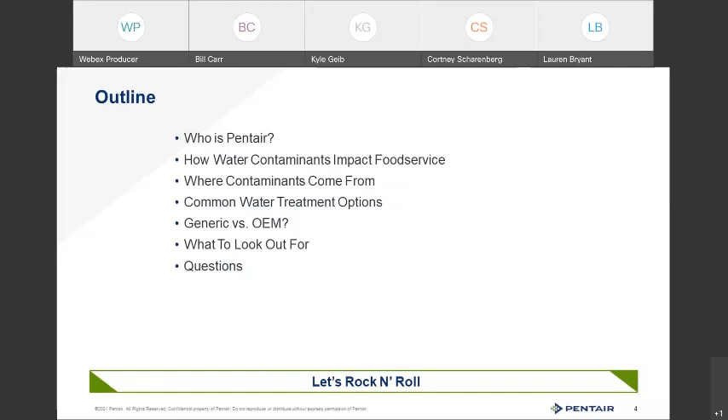But if you do have questions as we go, feel free to type those in the Q&A box. All right, so who is Pentair?

Pentair is actually a very large multi-billion-dollar water treatment company. We cover all different types of water treatment out there, from wastewater treatment and flood protection to aquaculture, aquatics, like the aquarium here in Chicago down the street from me, we have that, agriculture, you name it, we do it. We also have a residential group that makes components for softening and things of that nature. But what we're going over today is our food service and commercial water treatment solutions.

And that's the category that I come from and that Bill covers, and Partstown as well. So the brands you see here on the screen are maybe the names that would be familiar to you under the Pentair brand. So the one that's been around the longest is the Everpure line. We have 85 plus years doing water treatment for food service and commercial products.

The SHURflo brand, that's fluid movement for beverage primarily. Bag-in-box pumps and repressurization pumps, things like that. That's the SHURflo line. We recently acquired OptiPure. You may have seen that one out there before. We will be rebranding them to Pentair OptiPure.

And then another company called Clearwater Technology. These are ozone products. So we do have a handful of ozone products out there that you can get your hands on, one specifically for ice machines that we'll touch on, but we have some others as well that unfortunately we don't have time to go over today. So if ozone is something you're interested in, please definitely let Partstown know and we can get you hooked up there.

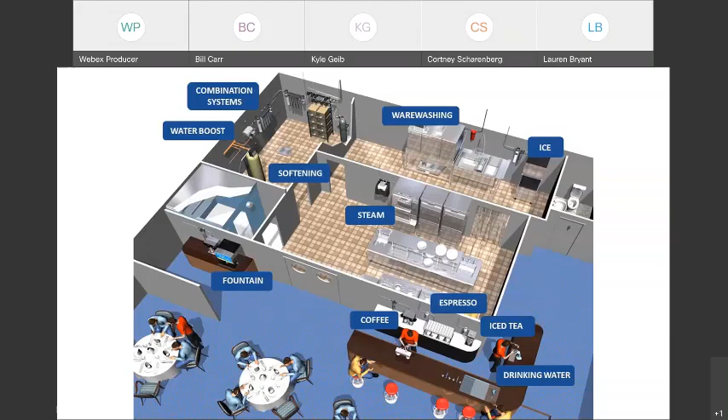Hot equipment is going to be a little bit more sensitive to certain things, whereas cold equipment might be less sensitive to those, or cold equipment might have special issues with different contaminants that hot equipment isn't going to have. But everything you see here, we can treat in some way, shape, or form.

Either at a point-of-use solution, where each individual piece of equipment can have its own water treatment product, or we have ways to put multiple pieces of equipment on one system to streamline a space issue or give you one system that can be in the back of the house.

We can also do what's called point of entry. So from where the water comes into the business or building, we can give you a soup-to-nuts solution, anything from water softening to filtration, reverse osmosis, and specialty products. We can put that all in a back room and let you know where you need to plumb that equipment.

So when you have remodels and new construction, that's really the way to go. It's a little bit more difficult with an existing building to rerun all your plumbing for filtration. But that's what we do, and this is what we're going to talk about today.

So how does water quality impact food service specifically? You saw those applications right there. Everything that you saw on the previous screen, the water quality is going to impact it in one of two ways.

Either the equipment performance side of things, or the product quality side of things. Product quality is somewhat self-explanatory, right? Any product coming off that piece of equipment needs to look good, taste good, and smell good. Coffee needs to taste like coffee.

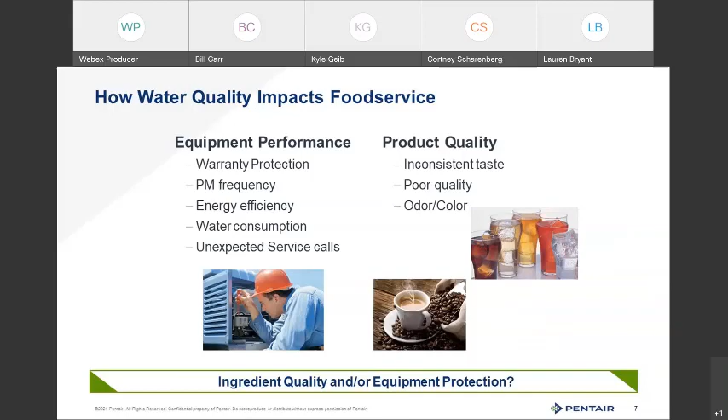So when it comes to solutions that we're requiring in the food service world, they will meet one or both of these categories: do we want ingredient quality water, or do we want equipment protection, or both?

So the applications that fall under product quality—again, this is pretty self-explanatory. If you look at the applications here on the screen, those are all consumable goods, right? We want them to taste good, look good, smell good. Ice, we want it to be clear and hard.

Fountain beverage, nice and carbonated. Coffee—if it's an espresso, we want it to have a nice crema. And these are just a few real quick things that can happen if we do not manage water quality properly.

Something people are not really super aware of, under coffee and espresso: the water quality itself—whether that's the chlorine disinfectant in the water, the mineral content, maybe too much calcium or not enough magnesium—all those things can actually impact the coffee taste profile and the experience of drinking that coffee product.

It could either be too weak or too strong based on that. If you don't have enough minerals in your water, the coffee will not extract properly and it'll be weak. If you have too much, say, hardness minerals, then you would get too strong of a brew.

That chlorine I mentioned can make the coffee acidic. Over extraction can make it bitter. Same with crema, as I mentioned on espresso. You can get earthy and moldy tastes of your water. If you don't take out things like what are called the organics in the water, you may have an algae sort of taste left over in the water. That is going to come out in your coffee.

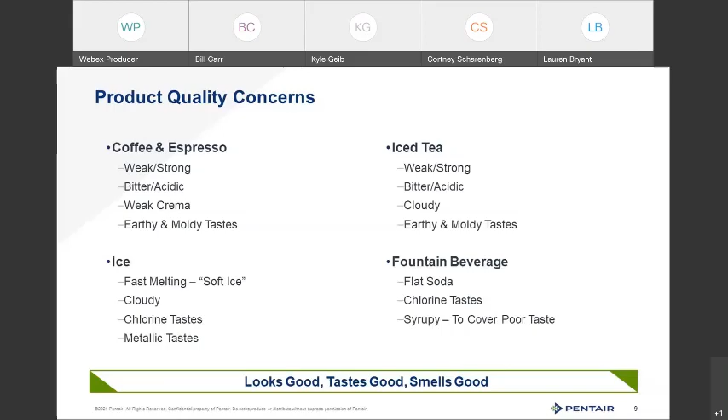Now, these applications are the ones that fall under equipment protection. So all of these here that we just went over fall under the product quality side, but they also fall under equipment protection. All of these are made of stainless steel products or copper pieces and parts. All of those things are very affected by water quality. They can also get scale buildup or corrosion. But I've added steam and warewashing.

So steamers, we don't need an ingredient quality water on a steamer. We just need it to not tear apart our piece of equipment. Same with warewashing. The detergents and things are going to wash the dishes, and they really have an impact on that water, but we can get scale buildup and clogging of rinse jets and things like that on warewashing equipment.

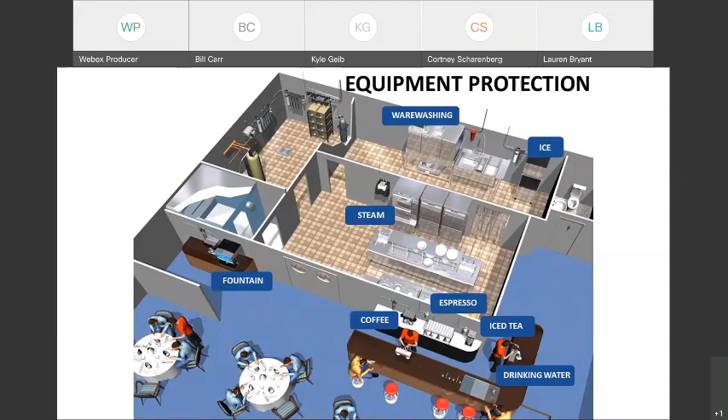So speaking of equipment protection, some of these photos might look familiar to some of you. On the left, we have corrosion. On the upper right, we have scale buildup. And on the lower right, we have slime buildup in an ice machine. We'll dig into these a little bit more.

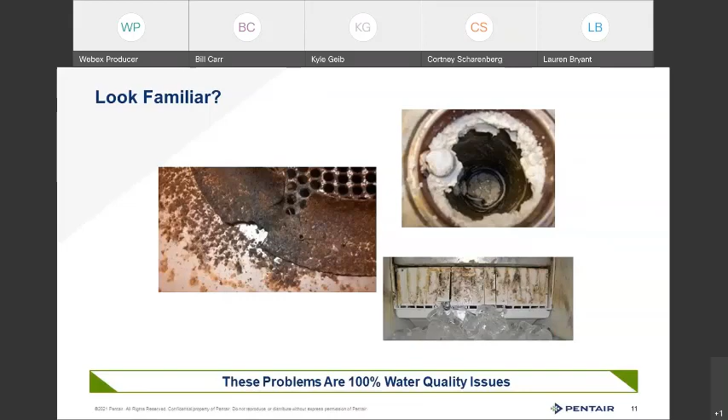So scale is nothing more than some of the minerals, what we call dissolved solids that are present in the water, precipitating out of the water in your piece of equipment. So certain minerals are actually going to contribute to that scale. The most common ones are calcium and magnesium, which is also known as hardness, water hardness. So the more calcium and magnesium you have in the water, the quicker this scale will build up. It does happen in cold equipment, but primarily in hot equipment, and it will happen faster the hotter you heat the water.

So to solve these, you call your service agent out to descale it. And the good thing about scale is we can remove it and the integrity of the equipment is still intact. But the more we descale that piece of equipment, the more the metals are going to be eaten away by the descaling agent. Because a descaling agent is actually acid. We're pouring a weak acid onto this scale to eat that away, all right?

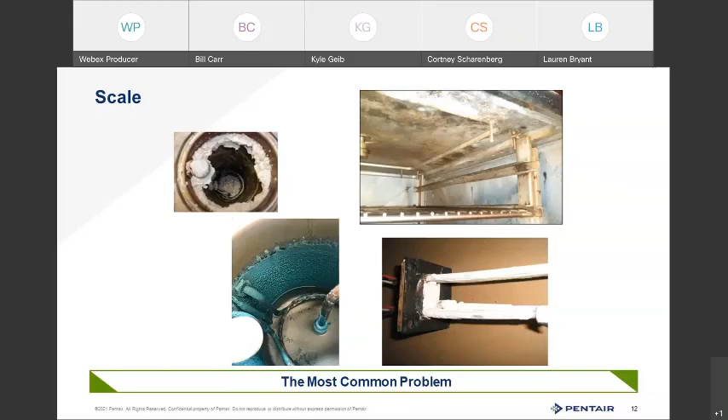The other downside with not treating for scale is what we're seeing here. Bill's going to go over this. These are a couple examples of some actual real world costs from descaling a combi oven or a steamer.

The one you're looking at on the screen, I partnered with a local service agent in one of my territories to get an idea of how much it actually costs. This is a Rational combi oven. As you can see, the amount of man hours needed to do this is really high, and labor alone is $1,068 of this invoice to descale a combi oven. These are anywhere from $25,000 to $75,000 pieces of equipment, and this combi oven itself was less than 1 year old. Someone opted not to put a filter system on it, and they are already paying $2,100 for descaling this combi oven.

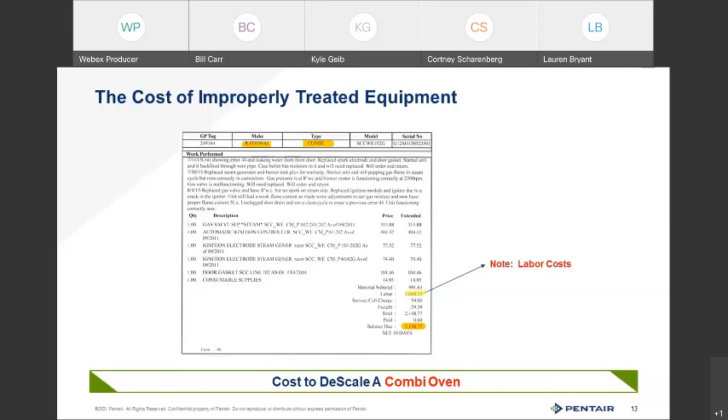You could purchase a reverse osmosis system, a type of filtration we'll talk about, that actually takes all the minerals out of the water and puts pure water back to this basically Cadillac sitting in a kitchen, so you're not having to worry about scale. It's all taken out and flushed down the drain with a reverse osmosis system. This combi oven is one of the more expensive pieces of equipment that could easily have paid for itself in one descaling. And instead they're having to dump a bunch of acid on the inside of your brand new shiny Cadillac in the kitchen to help clean that up.

This next slide is a little cheaper piece of equipment, a steamer. Steamers can be anywhere from $3,000 to $7,000. This particular steamer was also 1 year old. Someone opted to go cheap, buy the steamer, but not pay extra for water filtration. The service agent I worked with in another territory sent me this one: $2,600 to descale a 1 year old steamer. These are two examples, and $2,600 puts you halfway to the cost of a new piece of equipment.

And if you're not protecting your investments with water filtration, one, you're going to get expensive bills, and two, it won't be covered under warranty. So Cortney, if you want to go to the next one, I believe it's on the different slide.

Yeah, well this is corrosion. Yeah, you can go on. Go on to the next one. Actually, I think the slide's a little later, I don't think it adjusted itself.

So Bill mentioned the cost of the steamers. Scale buildup is super common in the United States because we have, on average, very hard water. The hardness of the water throughout the country varies greatly. In Indiana, where Bill is, the water is 23 grains of hardness, which is very high, but the average in the United States is 15. And 15 grains of hardness will cause scale buildup easily within 3 to 4 months that you would have to descale something like this.

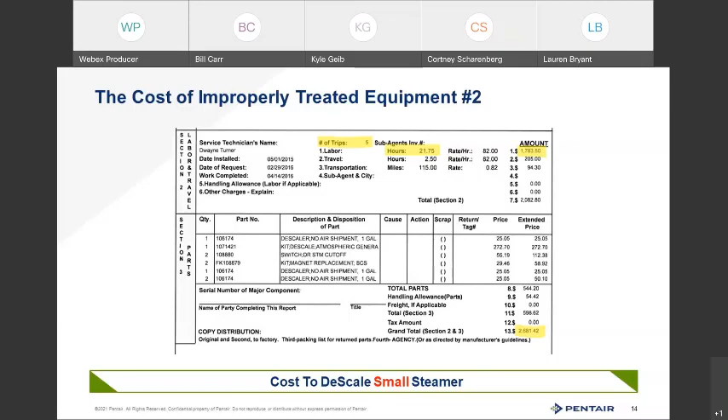So the next one is corrosion. Unlike scale, corrosion is the big bad problem when it comes to hot equipment, whether that's espresso, coffee equipment, or steam and combi ovens. These are expensive pieces of equipment. The problem with corrosion is it's rust. Once it starts, we've got to either stop it in its tracks at the very beginning, or we have to throw away that piece of equipment and start over, because once it's there, it just gets worse and worse, and things start falling apart real fast.

As I mentioned earlier, the beauty of scale is we can descale that piece of equipment, and usually the inside is pretty good. But over time, lots of descaling is going to lead to corrosion like this. However, there are certain minerals and contaminants dissolved in the water that can contribute to corrosion, and that varies greatly throughout the country. Around the Great Lakes in the Chicago area where I am, we don't really have a corrosion issue, but there are parts of the country like down near the south end of Texas, in Corpus Christi, where corrosion will happen as quickly as 1 month, eating away steamers and having to throw them away.

So we want to make sure we put the proper water treatment on to prevent this, and to do that, we need to remove the minerals that cause it. If anyone's interested in the chemistry, that happens to be something called chlorides, the primary corrosive mineral. Chlorides are dissolved salts, like sodium chloride or potassium chloride.

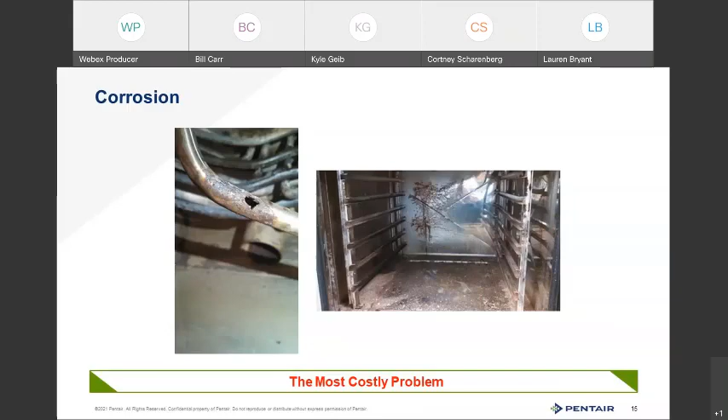As I mentioned, corrosion must be prevented. Bill said these are expensive pieces of equipment. When we get into steam and combis, you know, a steamer might be $2,000, but a combi oven can run up to $75,000. That would be like buying a brand new Cadillac or a brand new BMW and then never changing the oil. You're not going to do that. So you're definitely going to want to give it the proper protection.

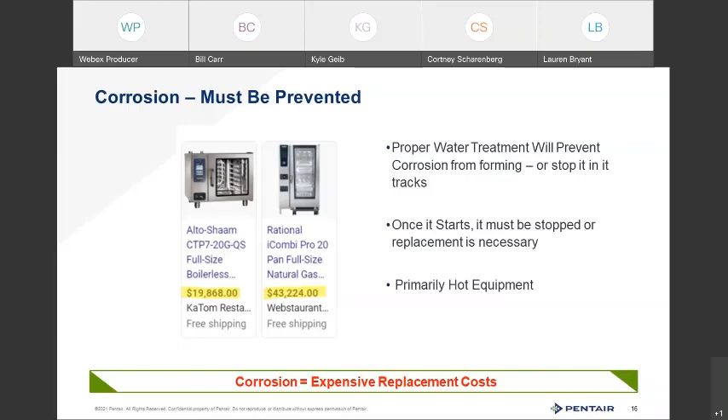When we specify expensive water treatment for that steamer or combi oven, there's a reason for it. We're wanting to prevent corrosion, in that case, when we're giving you a recommendation of a reverse osmosis system.

So, warranty—we mentioned that. Corrosive salts and corrosion are really why a lot of these expensive pieces of equipment, like espresso brewers or combi ovens, have water specifications on their warranty. These are examples here of two different brands where they give you a water specification.

The one on the left is a very vague spec. They just say water hardness cannot exceed 3 grains per gallon. That's a very vague spec, but water does not exist naturally at those low levels of hardness in very many parts of the country. So this is a case where, to prevent corrosion or scale buildup, they're asking you to make sure you meet that water spec.

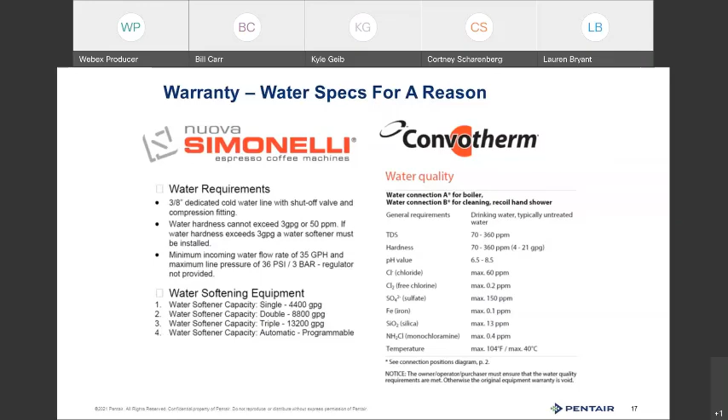Same here on the right. Unfortunately, we don't have a lot of time to go over all of this, but this is a very complicated spec where this combi oven company says, meet this. And if you do not put the proper water treatment equipment on here to meet this, you will be out of warranty, and they won't give you a new oven if it falls apart.

What this is, is bacteria and yeasts that actually come from the air. These are airborne yeasts that get into the perfect environment to grow in an ice machine—it's dark, it's damp, and it's cold. So they latch on there and grow like crazy.

Ultimately, this requires a regular cleaning service to come out and make sure this stuff doesn't happen. From a water quality perspective, there are only a couple things in your water that might contribute to this, like high iron. Iron is actually food for airborne bacteria and yeast, so they love it. If we don't remove the iron from the water, it can contribute to this—plus you'd end up with bad tasting ice if you had high iron.

There are things we can do to prevent this, but from a water quality perspective, it really more falls on what's coming from the air. If you have a lot of yeasty things in your air—like you're baking bread, or there's a lot of beer around—it's going to contribute to this. I also see places where they have an ice machine on the back dock where trucks are unloading and putting out diesel fumes. That's a situation where you're going to have very high levels of slime buildup.

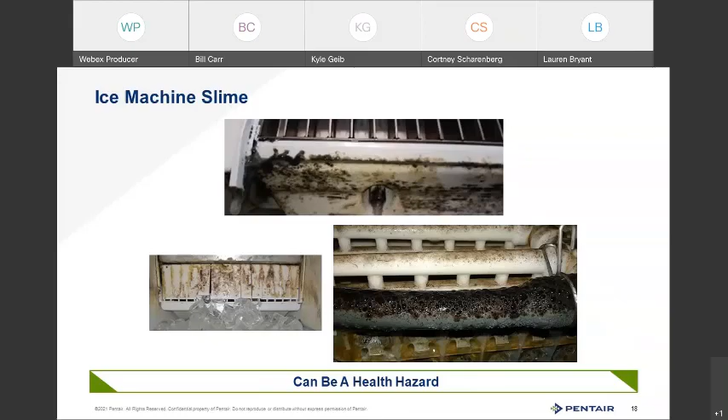We definitely recommend cleaning those regularly to prevent this, but there is a health problem that can come from the slime in ice machines. One of the big ones is an HVAC standard called ASHRAE 188. If we have any maintenance or facilities people on the call, you're probably very familiar with ASHRAE. For anyone else, it's the standard that says you must prevent the transmission of Legionella bacteria through an HVAC system, and to do that, you need to use certain chemicals in your condensing units and things like that.

That's because Legionella bacteria, which leads to Legionnaire's disease, grows in the condensing units of an HVAC system and is then aspirated through the system—little water droplets get blown through the HVAC system, and we humans breathe that in. If you breathe in Legionella bacteria, you get a respiratory pneumonia called Legionnaire's disease.

And it can be very deadly. 1 out of 10 people that get it will die. But in healthcare situations, nursing homes and hospitals, it actually jumps up to 1 out of 4 people who contract it will die. So in healthcare, and as I say here, facilities housing patients for longer than 24 hours, there's actually a requirement that these buildings need to do something to reduce the growth of Legionella.

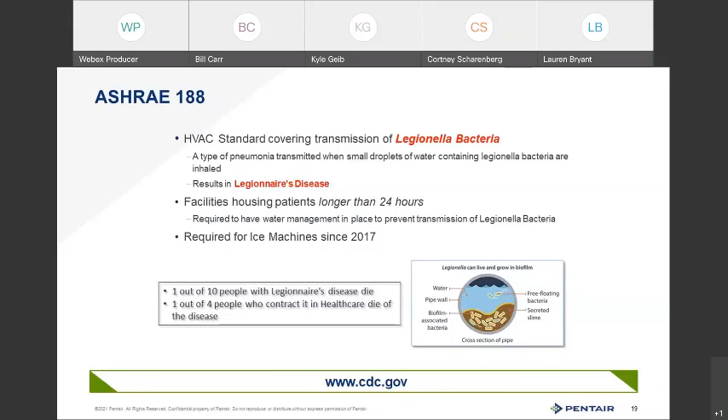Carbon is the primary way that we remove disinfectants from water. So that's what we know as chlorine that comes from our municipality, or another product called chloramine. The idea behind this filter is that if you do not remove the disinfectant that your city puts in the water, some of that disinfectant will be left over and it will go into that ice machine to help kill any of that mold growth or the bacteria or yeast growth in there. So having this filter in a healthcare environment will help you be in compliance with ASHRAE.

Another option that's available is a small ozone generator. This is what we call our OxIdice. So what happens is this little generator creates ozone in the water of your ice machine and in the air of the ice machine. So it does what's called oxidation, and oxidation will kill any of the bacteria or yeasts that happen to get into that machine. So that'll help.

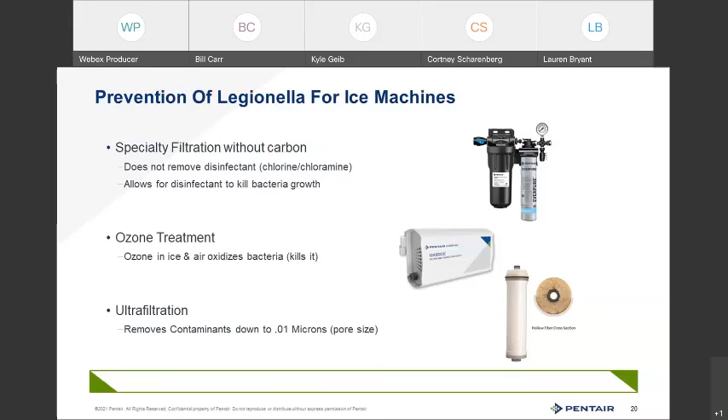Okay, so where do these problems come from that I just mentioned? I did drop a few terms on some of these contaminants, but I just want you to see the different categories of contaminants. So in the water treatment world that I reside in, anything that is in the water that is not pure H2O molecularly is considered a contaminant. So water may be safe for you to drink, right?

Because the municipality put in all the disinfectant, chlorine. They were testing it for heavy metals and all the things that might make us sick. It might taste good to you, it might keep you safe, be nice and healthy when you drink that water, but it might not make good coffee, or it might cause scale buildup in an ice machine. It might cause corrosion in a combi oven. It might eat away at our espresso brewers or cause cloudy tea. So everything is considered a contaminant to us. And then these contaminants are broken down into different categories.

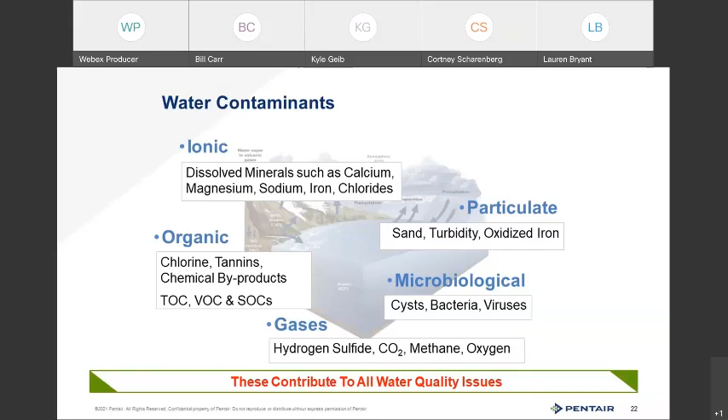Depending on what the water quality is going into whatever type of application or piece of equipment we're trying to protect, that's where we put the two together and choose the proper solution. In general, we have what's called base filtration, which are really carbon filters or sediment filters just there to remove dirt, or a combination of dirt and carbon removal. We call that base filtration. As far as contaminant categories go, those usually remove organics, particulates, and microbiologicals. So when you have carbon filtration, it's taken that stuff out only.

Then we have special water treatment, which would be water softening—called ion exchange, or different types of ion exchange products. Reverse osmosis is a big one out there. Deionization or ozone products too. So in situations where we have corrosion, for instance high levels of chlorides, reverse osmosis is actually needed to remove those chlorides to prevent corrosion in your steam and combi ovens and also espresso machines. So when we recommend reverse osmosis to you, it's because we're trying to prevent corrosion specifically, or to get you a nice taste profile for coffee if there are things impacting that. As far as categories go, those specialty products are there to remove the ionic contaminants or those dissolved gases.

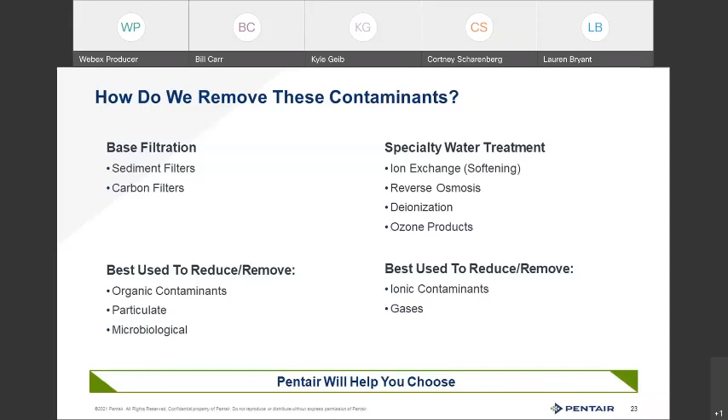So we are here to help you choose the right solutions. Parts Town is your first line of defense, so always contact them, and then they will get us involved to help you get the right product. Whether we have to come out and test your water or something along those lines, we will do that.

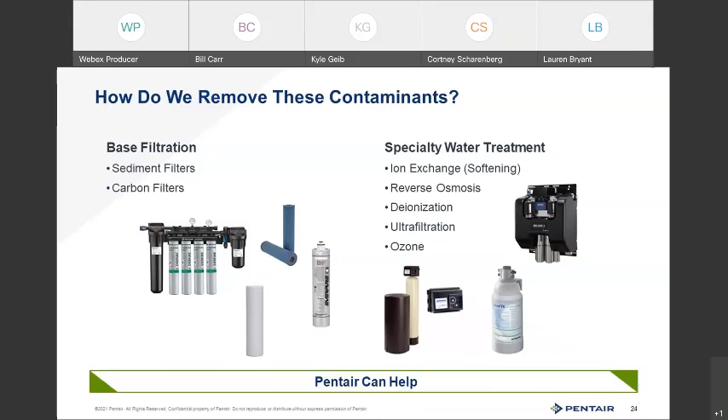So what to look out for? I know the OEM versus generic categories and concerns out there are big in our world of food service. It's just as big in water treatment as it would be with parts.

The difference with Pentair is all of our products go through third-party testing. They all hold NSF certifications. So when we come out with a new product, or a product is up for review after a handful of years, it goes off to NSF and they test it for the things we want the filter to do—whether we want it to remove chlorine, taste, and odor, or cysts, or whatever it might be. They test to those standards and then certify that the product does those things.

Now, what's unique is with our filters, when you put them into one of our manifolds—so you end up with an entire Everpure system or OptiPure system—if you put someone else's filter into our manifold, it actually voids the NSF certification. It also voids the warranty. So if you do that, and let's say you get a leak, and you call us up and say 'hey, your system's leaking,' and we see that you have somebody else's filter in the head, we won't replace that for you.

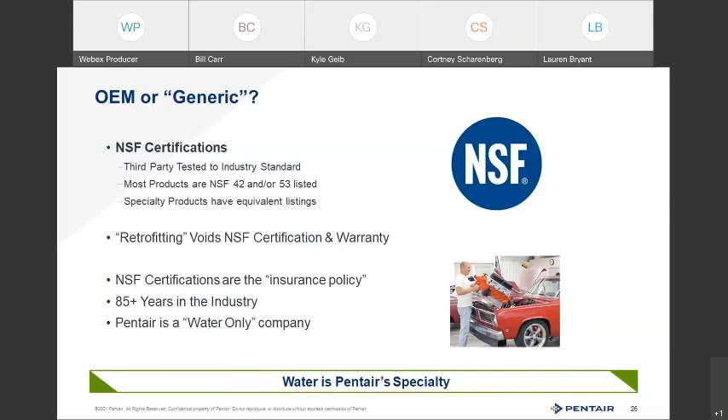So why Pentair in general? I mentioned all the NSF, but we are also a full spectrum, full service water treatment company. Water is all we do, we specialize in it. We've got a whole company that does anything from pool filtration to aquaponics, agriculture, and fluid movement for wastewater treatment. We do all of that. But my group specializes only in filtration for food service and commercial. So all those pieces of equipment, all those applications, we know them inside and out. We know the manufacturers and what they're looking for, and we can give you solutions specifically for that.

We also do what's called total water management - anything from water testing and analysis to site surveys. From that testing and site survey, we give you a right-sized product solution. A lot of trends out there say buy this one filter and it'll do everything you need. We're very aware at Pentair that there's really no such thing as a one-size-fits-all solution. If there was, I promise none of us would want to pay for it - that would be very expensive.

So what we try to do in all situations is give you exactly what you need, not too much and not too little. There's no point getting a 50,000 gallon capacity filter on a coffee brewer that uses 15 gallons of water per month or per year. That's not right sizing.

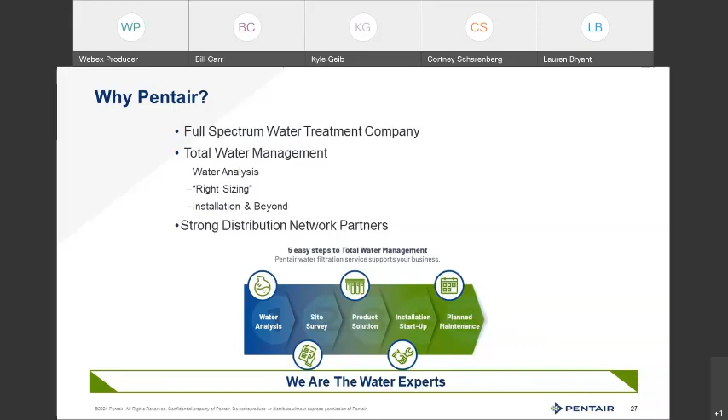So we do water testing, water analysis, site survey, product solution choices, and then we can actually do an installation and startup. We have authorized service providers, people trained by us to make sure installation goes properly. And then we actually have planned maintenance, so if you want regularly scheduled service for filter changes and things like that, we have the ability to do so. We also have strong distribution network partners like Partstown that can support you in the field and get you your product quickly.

So when it comes to preventative maintenance, it's very common that people ask how often they're supposed to change their filters. Well, in general, the rule of thumb is every six months. So everything you're going to get right-sized from Pentair, or even from our competitors, is usually sized for a six-month change out. The reason for that is if you're not changing filters, or you're waiting too long to change them, those filters themselves can actually become little cesspools of bacteria growth.

So when it comes to starting up, if you've got a location and you're just opening because of a post-pandemic situation or reopening, you're definitely going to want to change out those filters to prevent any breakthrough bacteria or mold growth that may have happened inside that filter from getting into your equipment. The same thing can happen if you're shut down for a period of time, or just using the product for a while.

Carbon has a life capacity. So we size filters to be able to hold so much contaminant, so much chlorine, or so many organics - those things that cause earthy and moldy tastes. Once that carbon is filled up, it can no longer do what it's supposed to do. So those are sized for roughly that six-month change out.

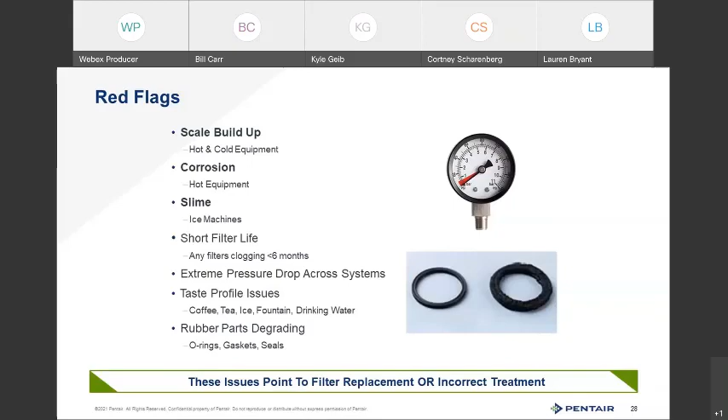That's another red flag. Another thing we see often: if rubber parts in your equipment, like door gaskets, O-rings, seals, are starting to degrade, they crack, get dry, or liquefy, that's an indication you are having water quality problems with improper treatment as well. What happens is a type of disinfectant used by municipalities called chloramine, and the ammonia will actually eat away at rubber parts. So look out for those things, and if you have them, give us a call.